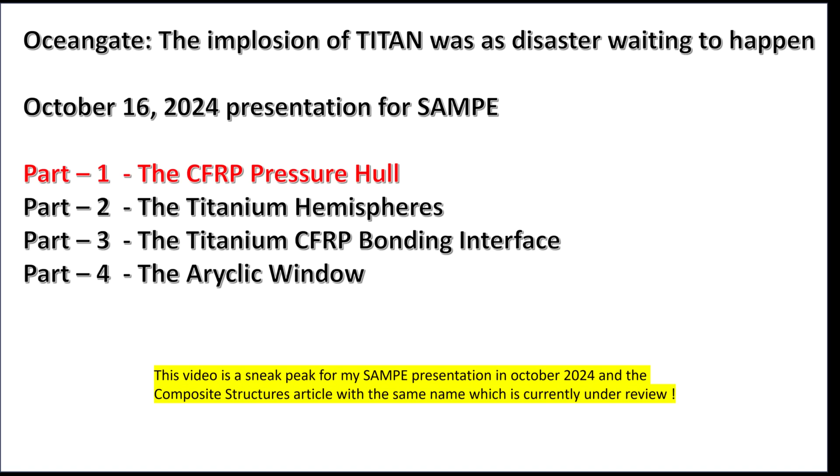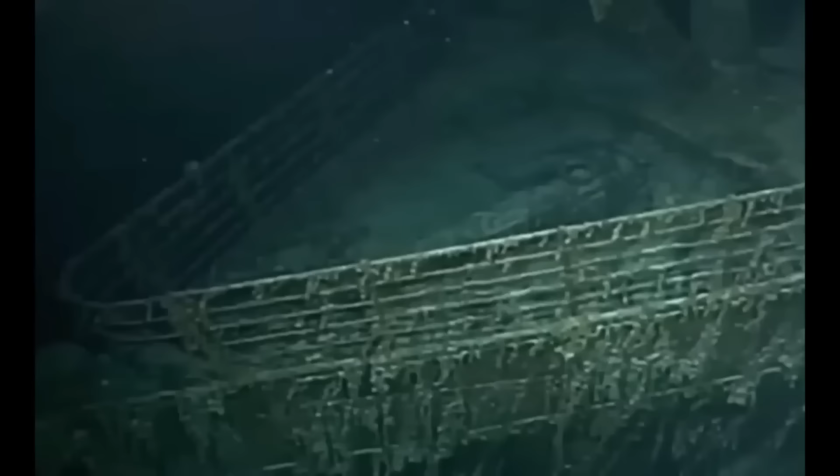On 18th June 2023, Titan, a submersible operated by the company OceanGate, imploded during an expedition to view the wreck of the Titanic in the North Atlantic Ocean off the coast of Newfoundland, Canada.

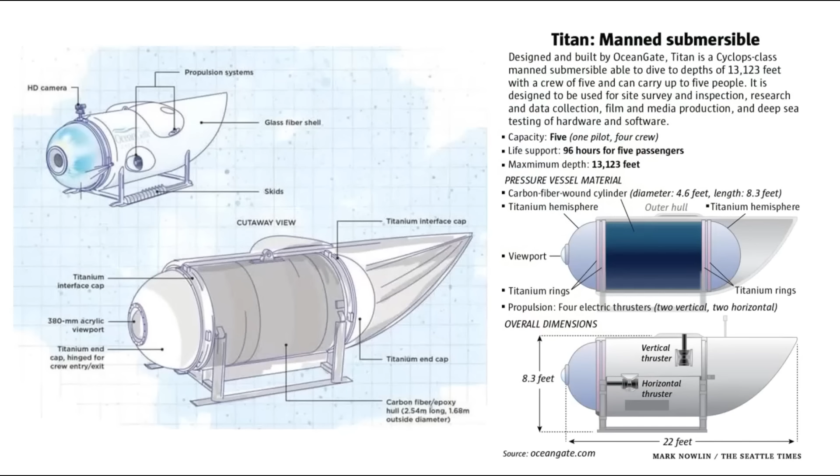Formerly known as Cyclops 2, Titan was a 5-person submersible operated by OceanGate. The 6.7-metre-long, 10-ton pressure vessel was constructed from carbon fibre and titanium.

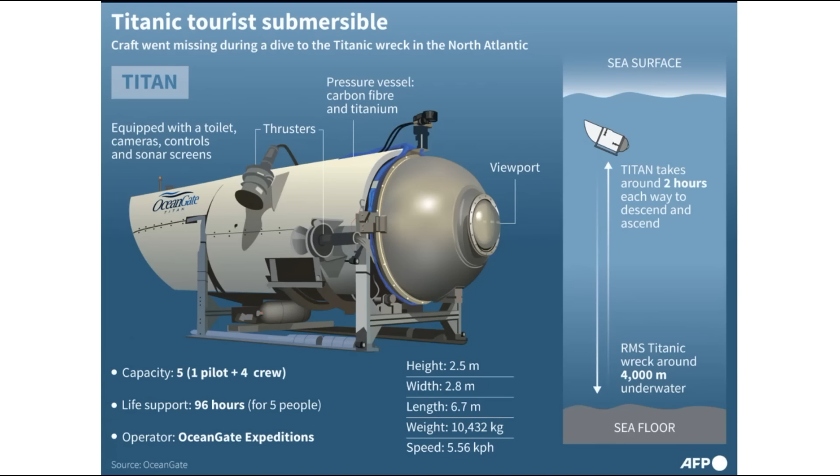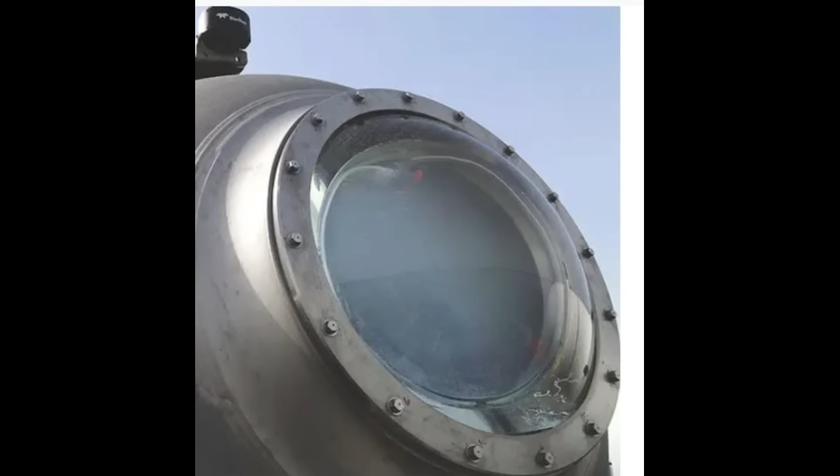The pressure vessel consisted of 2 titanium hemispheres with matching titanium interface rings bonded to the 2.54-metre-long carbon fibre wound cylinder. One of the titanium hemispherical end caps could be detached to provide the hatch and was fitted with a 380mm diameter acrylic window.

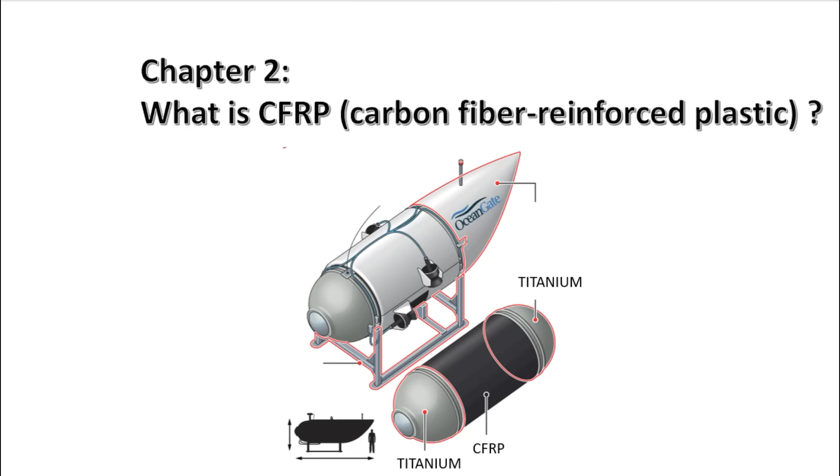While myriad issues likely contributed to the vessel's demise, Titan's carbon fibre hull has drawn particular scrutiny, especially because it was one of the first submersibles to use such a material. Carbon fibre reinforced plastic, CFRP, is a material consisting of several constituents: a base or carrier substance, also called matrix, and a second reinforcing component, the carbon fibre, which is embedded in the matrix.

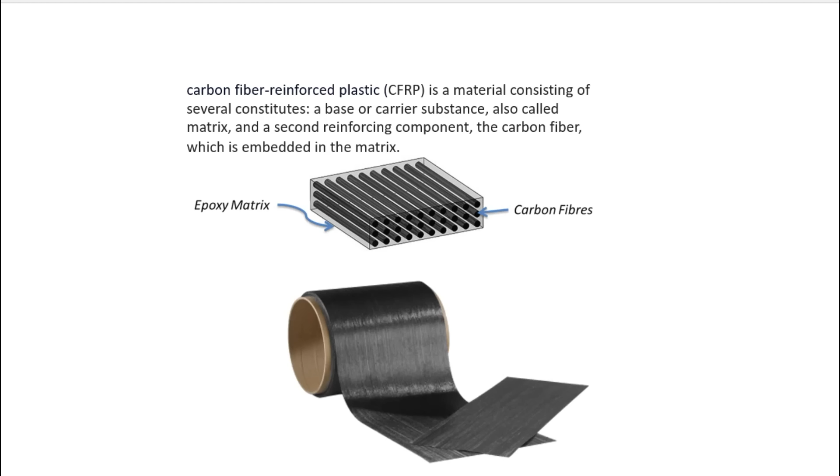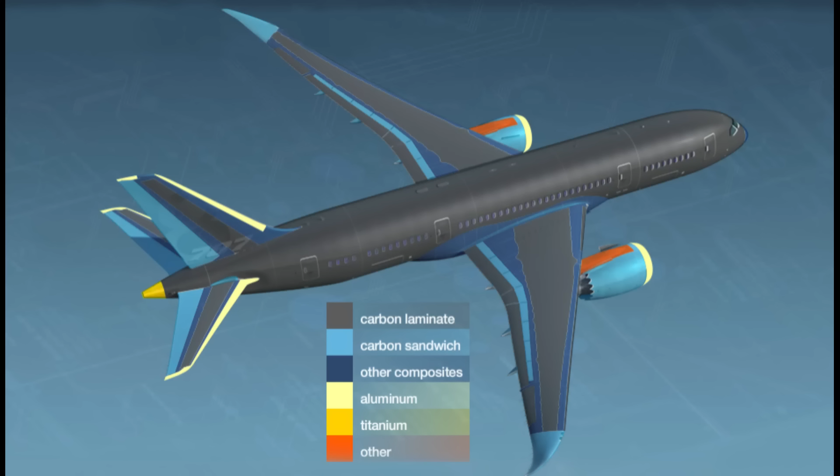CFRP is a composite material renowned for its high strength-to-weight ratio, making it a preferred choice in various high-performance applications such as aerospace, automotive, and sporting goods. The unique properties of CFRP arise from the combination of carbon fibres and a polymer matrix.

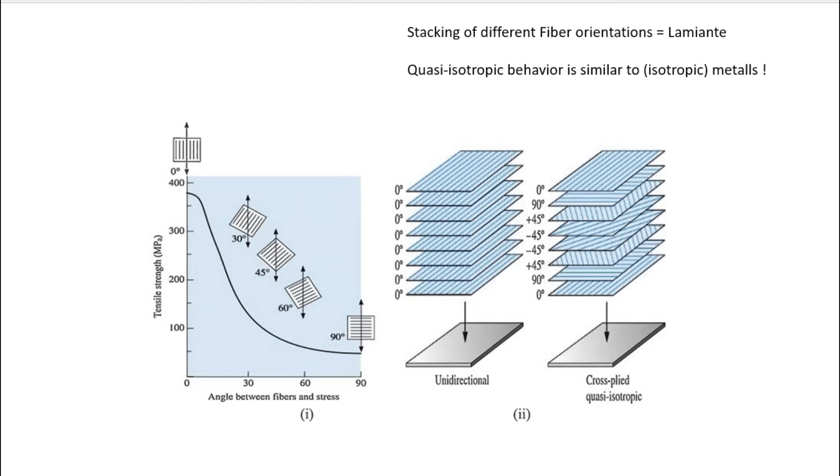The performance characteristics of CFRP are significantly influenced by the orientation of the carbon fibres within the polymer matrix. Carbon fibres are incredibly strong along their length, but relatively weak in other directions. Thus, the orientation of these fibres in the matrix is crucial to achieving the desired mechanical properties.

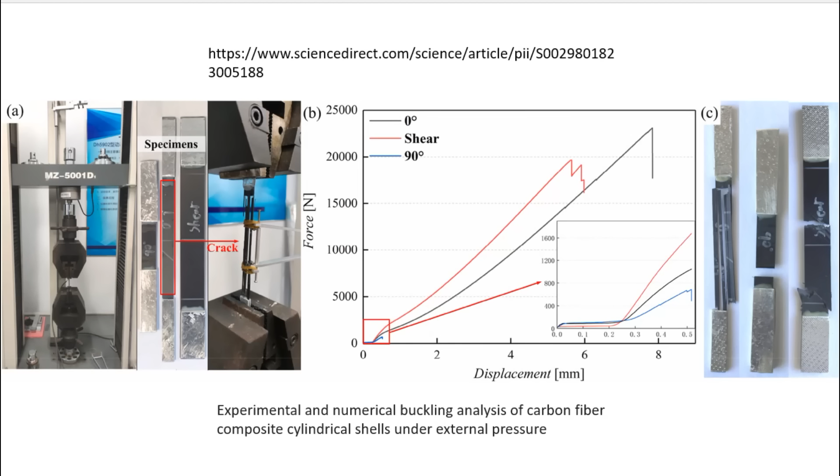Common fibre orientations include unidirectional, where fibres are aligned in a single direction. This orientation provides exceptional strength and stiffness along the direction of the fibres, making it ideal for applications where loads are primarily in one direction.

Bidirectional cross-ply: fibres are woven into a fabric, providing strength in 2 perpendicular directions. This orientation offers a balance of strength and flexibility, useful for components that experience multidirectional loads.

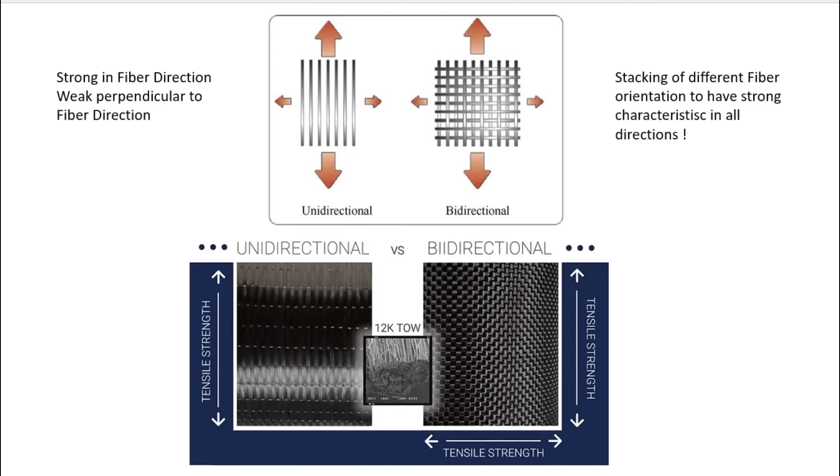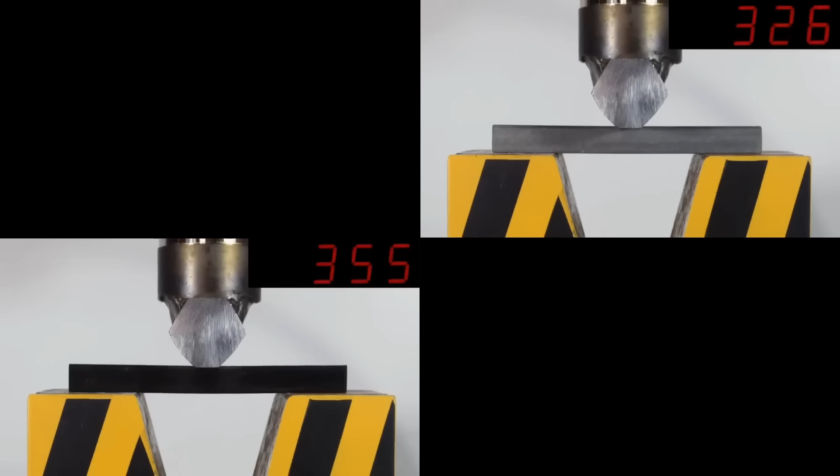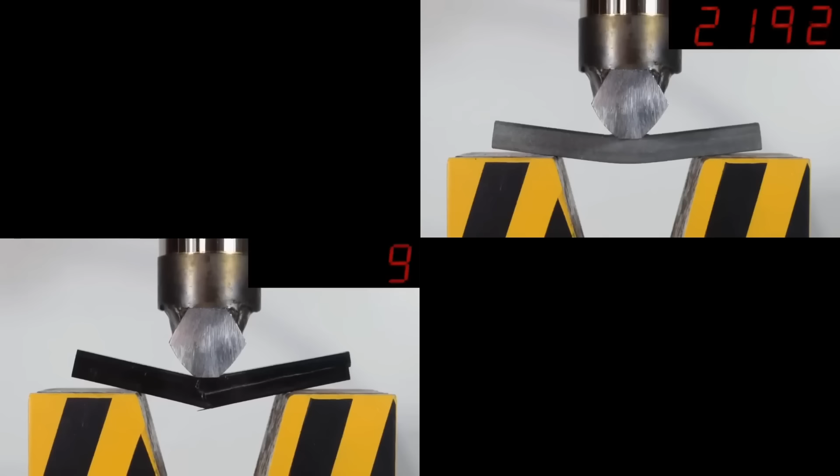A commonly shared misconception about the material strength of CFRP is shown here in the following video. This video shows a 3-point bending test of a CFRP and a titanium specimen. The titanium specimen carries about 3 times the load until failure compared to CFRP, and therefore people concluded that titanium is much better than CFRP.

But this video doesn't show the whole truth from an engineering perspective. From the looks of it, both test specimens are about the same dimensions. Titanium carries 3 times the load until failure compared to CFRP, but titanium is also about 3 times heavier. So in terms of load-to-weight ratio, both materials are about the same in this 3-point bending test scenario.

In a pure tension test scenario, CFRP can handle about twice the load of titanium. In a pure compression test scenario, it is about as good as titanium.

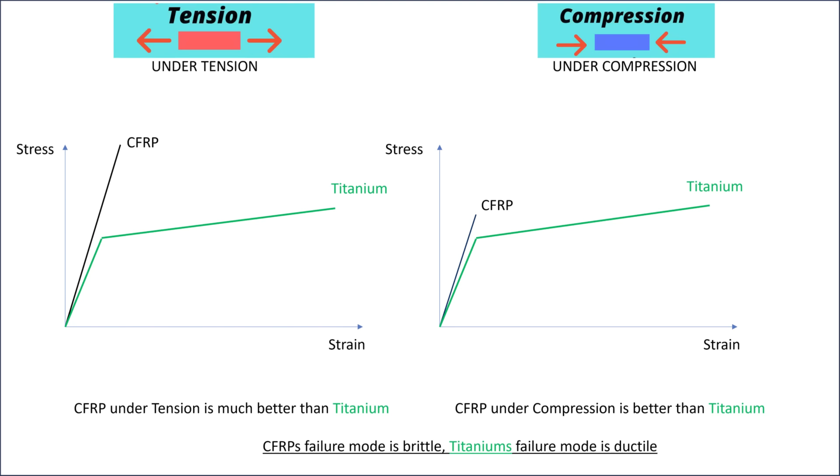The main difference is the failure mode of the material. CFRP is brittle, which means it breaks instantly when its material strength is exceeded. Titanium is ductile and carries still some load after exceeding its yield strength and doesn't break immediately. The brittle failure mode is the main disadvantage of CFRP because it doesn't allow any errors in design calculations.

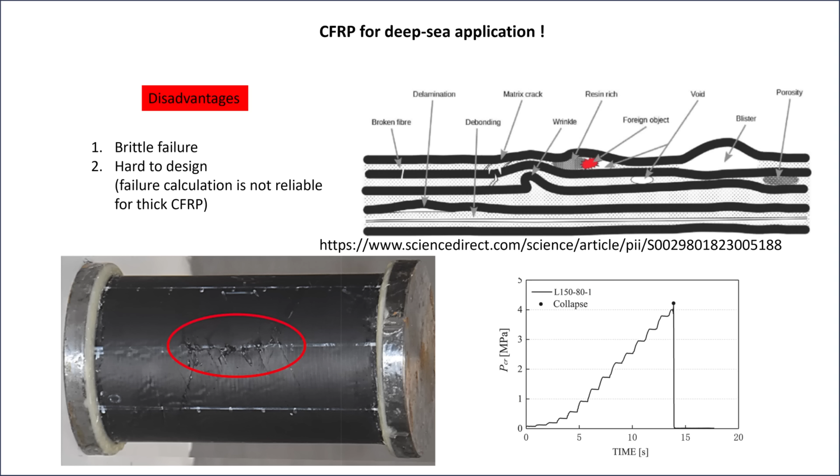The CFRP cylinder of the Titan was manufactured 2 times. The first version was built in 2017 by Spencer Composites. The carbon fibre hull of the Titan features alternating layers of UD prepreg in the axial direction and wet wound carbon fibre filaments in the hoop direction.

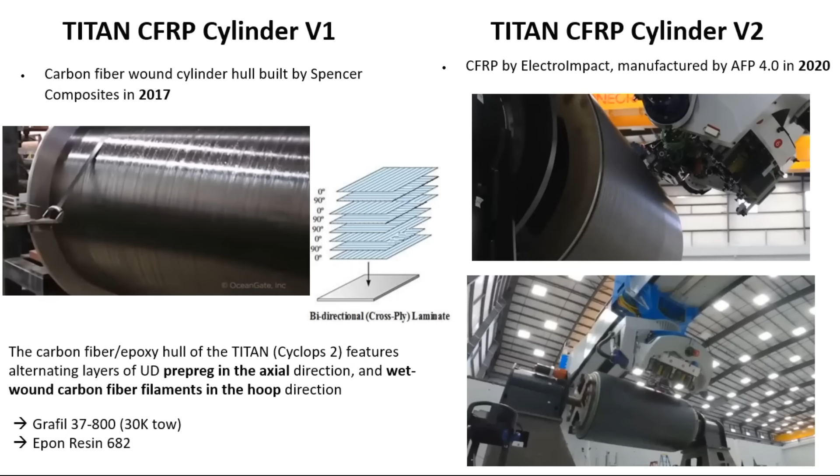The second version was built using automated fibre placement by ElectroImpact in 2020. The cross-section of the second CFRP cylinder has 667 layers of CFRP and is 127 millimeters thick.

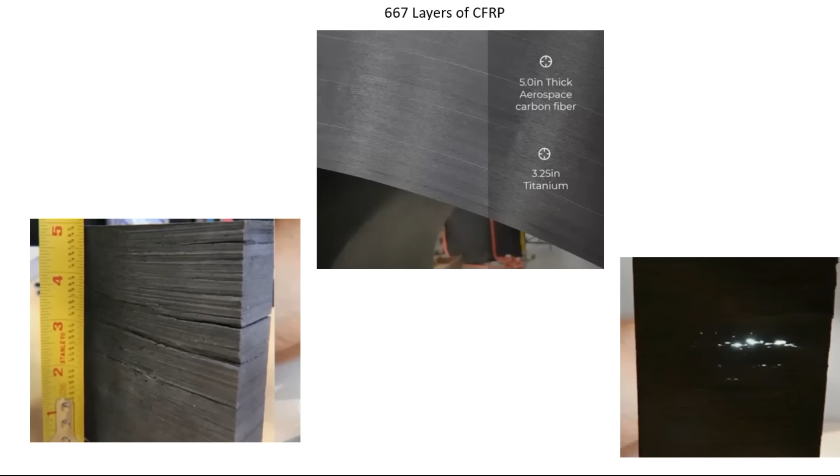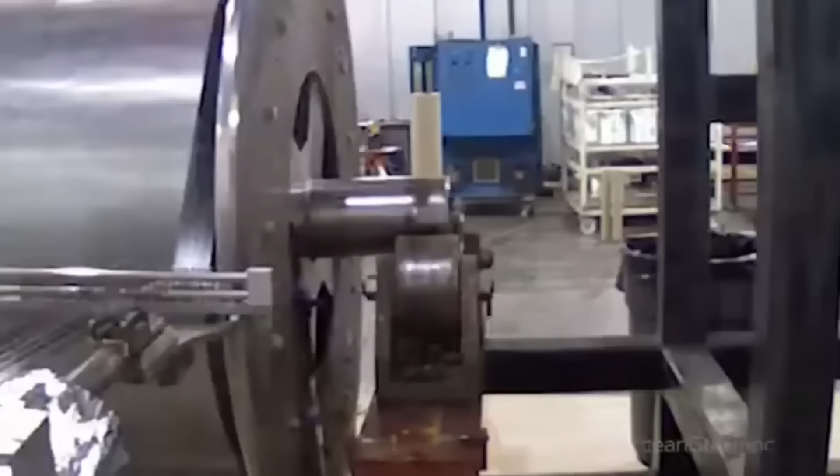The manufacturing process of the CFRP cylinder works like this. A mandrel, which serves as the core around which the carbon fibers are wound, is prepared. The mandrel can be made from various materials, including metal, plastic, or even dissolvable materials if the mandrel is to be removed after curing. The filament winding machine is set up, which consists of a rotating mandrel and a fiber delivery system.

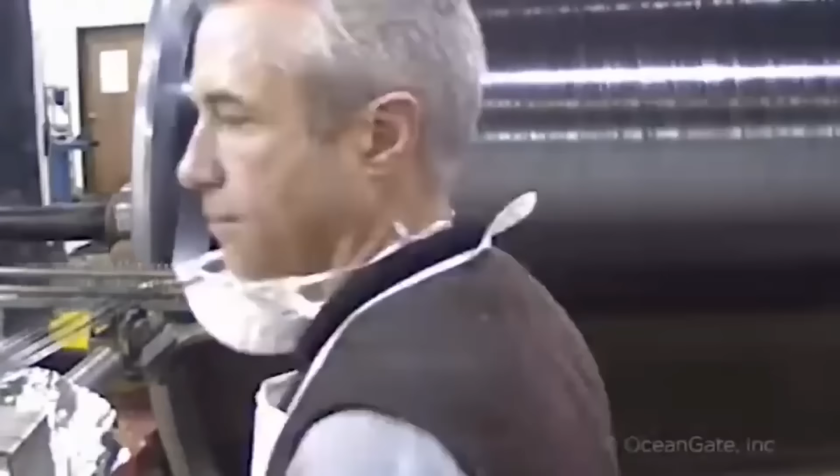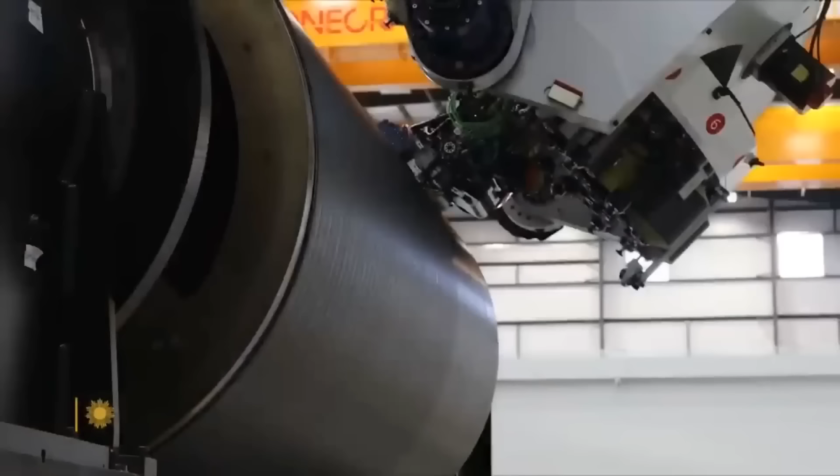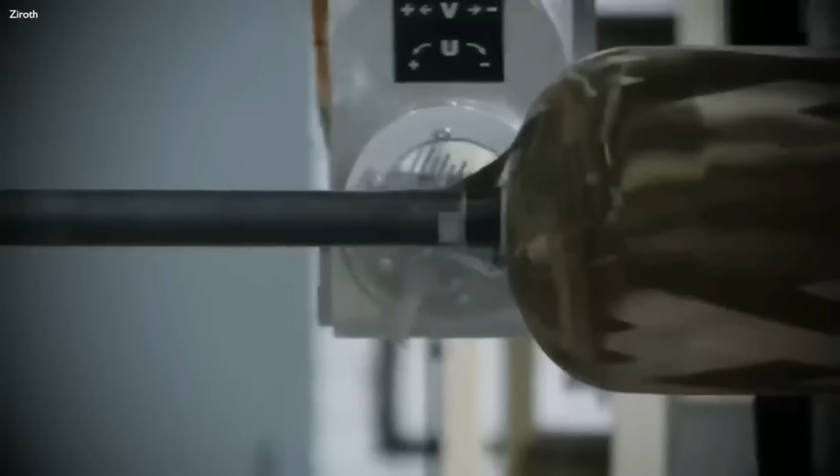Carbon fibers, typically pre-impregnated with resin (known as prepreg), or dry fibers that are wetted with resin during the winding process, are fed from spools through tensioners to the winding head. The mandrel rotates while the winding head moves along its length, laying down the fibers in specific patterns. Multiple layers of carbon fiber are applied to build up the desired wall thickness.

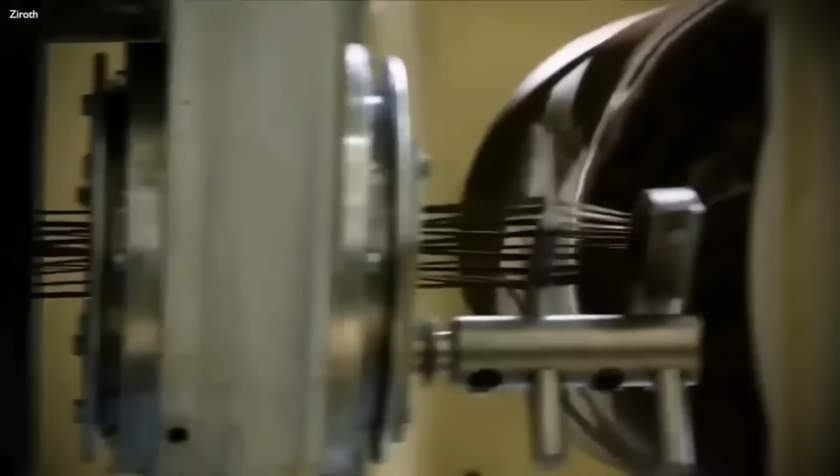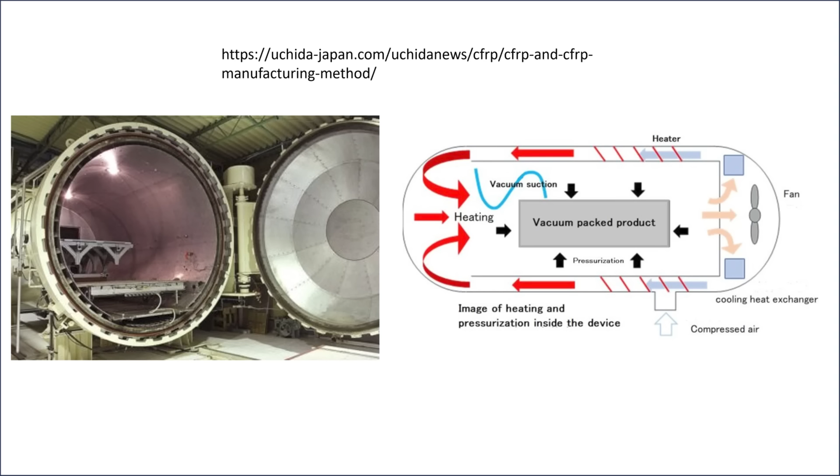After winding, the composite material is cured to harden the resin and lock the fibers in place. The curing process involves heating the mandrel and wound fibers in an oven or autoclave, following a specific temperature and pressure cycle. Once curing is complete and the composite has solidified, the mandrel is removed.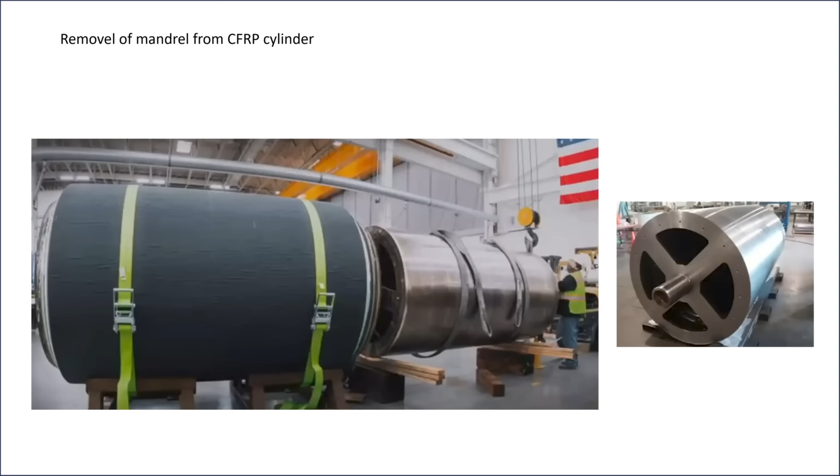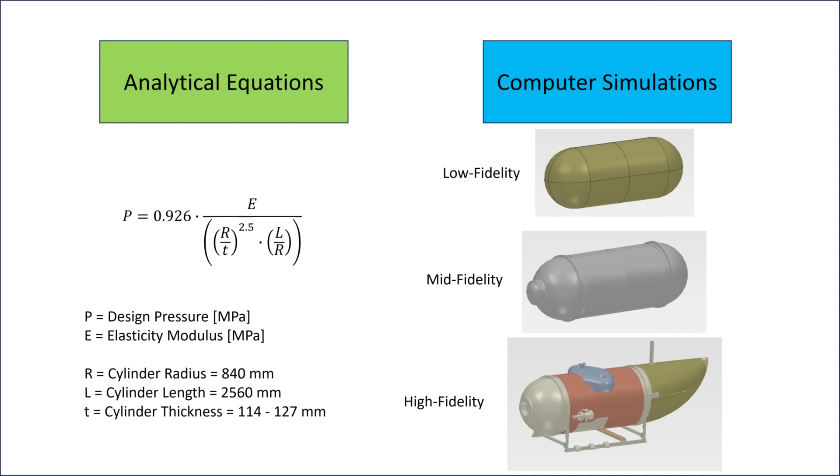The design of the Titan can either be done using analytical equations or computer simulations. Analytical equations work well for isotropic materials like titanium, but are not as reliable for thick composite structures like the CFRP cylinder. Computer simulations can be categorized according to their order of fidelity, like low, mid, and high fidelity.

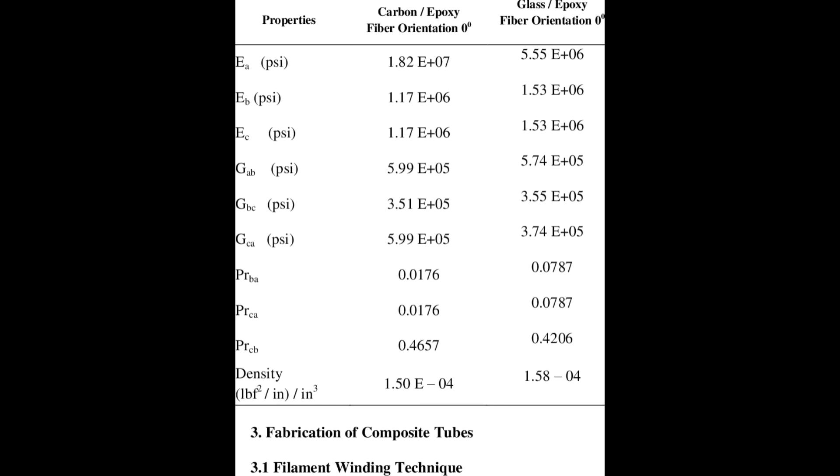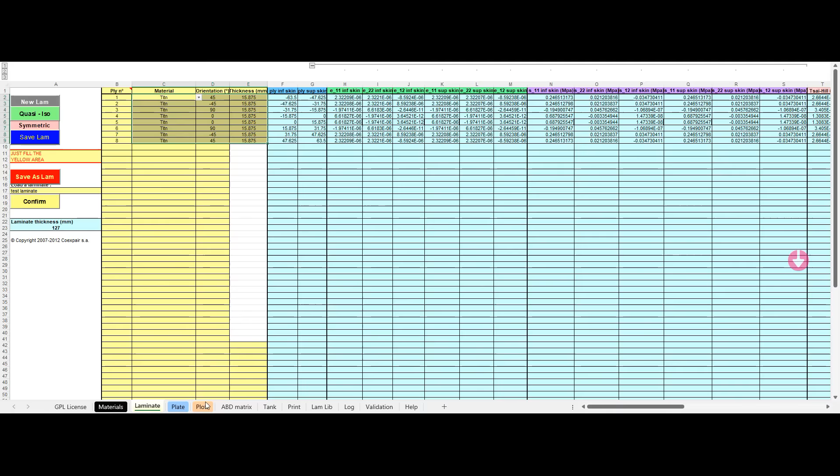The analytical equation shown here is only valid for isotropic material and is not compatible with the CFRP material description, which requires multiple material parameters. But using the well-known ABD stiffness composite matrix, we can treat CFRP as an isotropic material, as we assume the individual laminate layers can be smeared to a quasi-isotropic material. The analytical buckling pressure is estimated to be 84 megapascals using this methodology.

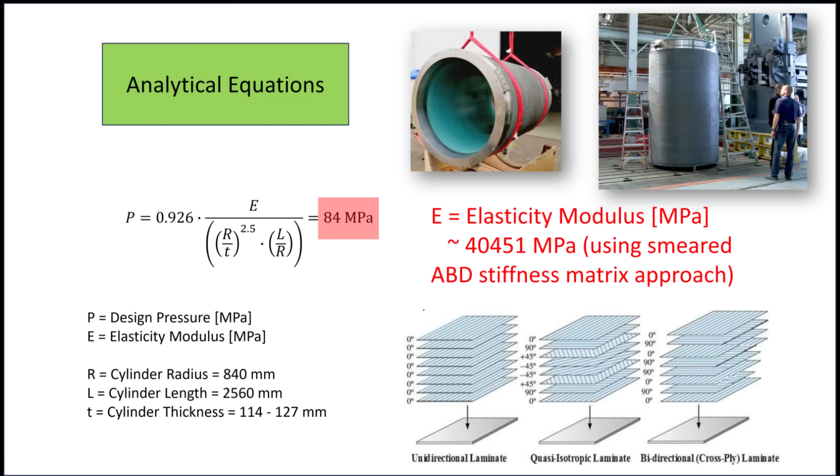In the simulations, three main aspects are considered. The first aspect is buckling. The linear buckling analysis results in a design pressure of about 70 megapascals, depending on the order of fidelity.

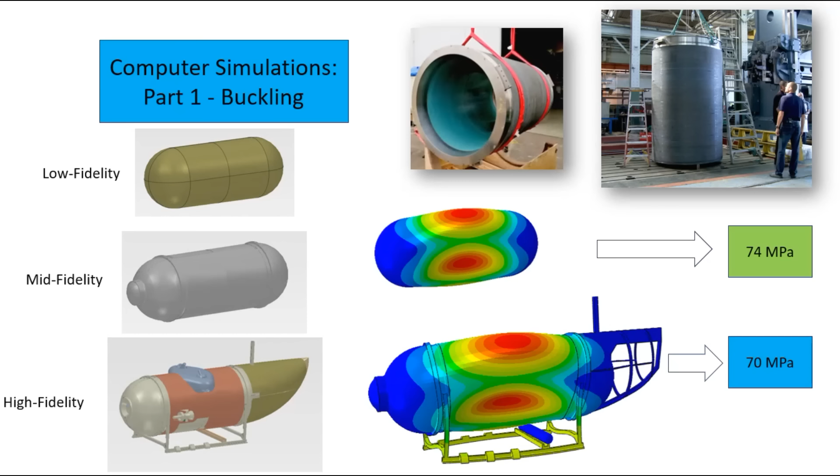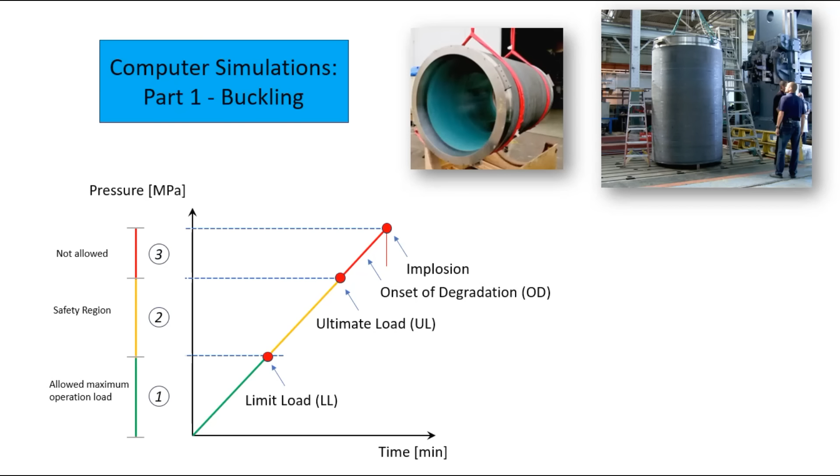The design of the CFRP pressure vessel is usually divided into three regions: the limit load, the ultimate load, and a safety reserve. The limit load is the operation load of the Titan, which is assumed to be 40 megapascals, which corresponds to the pressure that we would expect at the depth of the Titanic.

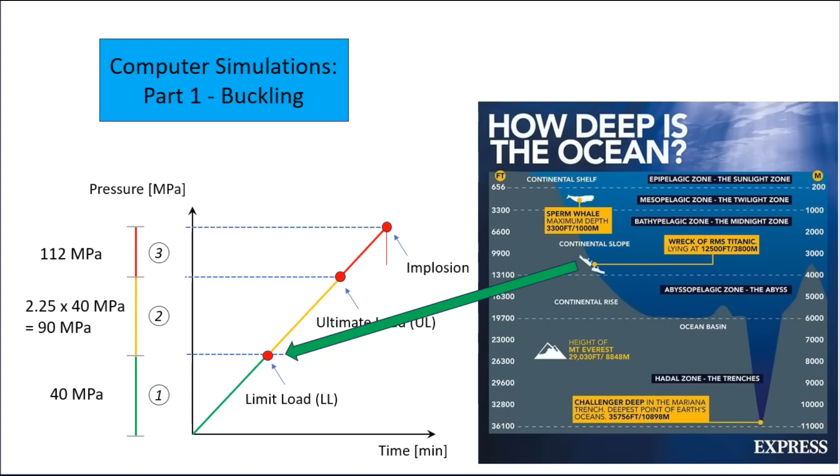The ultimate load is the product of limit load times a safety factor, which was 2.25 according to an article in Composite World. The article stated that a safety factor of 2.25 for a thickness of 114 millimeters was established for the CFRP cylinder, but the thickness of the CFRP cylinder was increased to 127 millimeters for additional safety.

However, the results of analytical equation and simulation show much lower loads than we would expect. If we have 90 megapascals for a thickness of 114 millimeters, the maximum pressure in the safety region would be 112 megapascals for a thickness of 127 millimeters. Instead of 90 megapascals, our simulation shows 74 megapascals, and even if we increase the thickness to 127 millimeters, we barely get about 90 MPa as a design load.

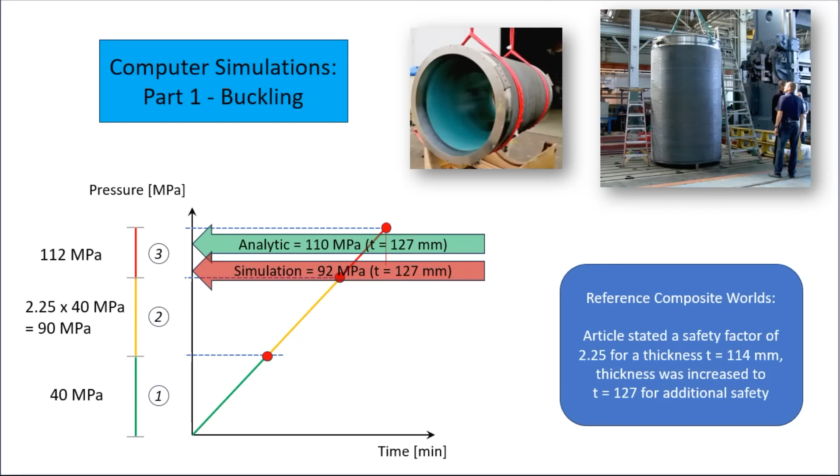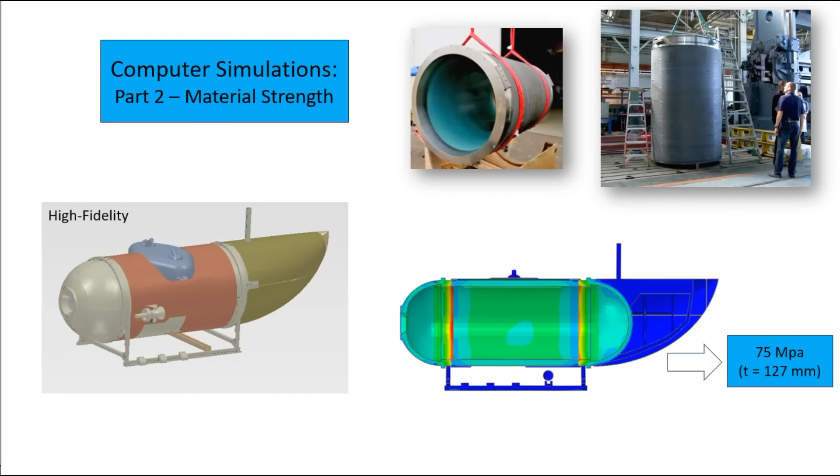The second part of the simulation involves material strength. In the case of CFRP, we consider fiber as well as matrix fracture in tension and compression. Using this methodology, we get a design load of about 75 megapascals.

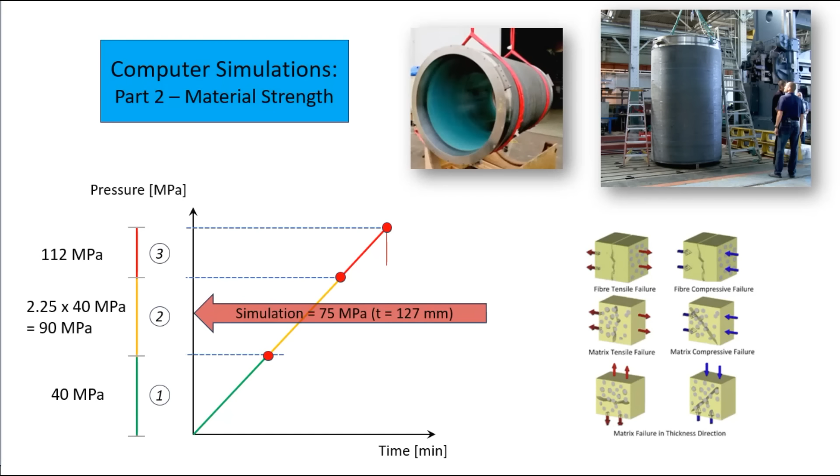If we consider imperfections as a third aspect, the design load is reduced even further. The well-known energy barrier criterion, EBC, delivers a design load of 56 megapascals.

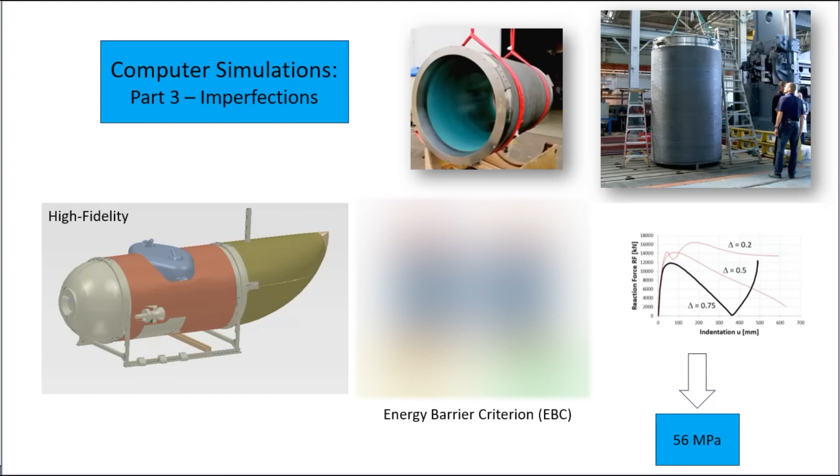There are still some open aspects, like: 1, variation of material data; 2, variation of wall thickness; 3, effect of temperature; 4, effect of dry-wet cycle; 5, adjacent structure influence, which is not considered. The design factor is already lower than 1.5.

What does the CEO of OceanGate have to say about this rather low margin of safety?

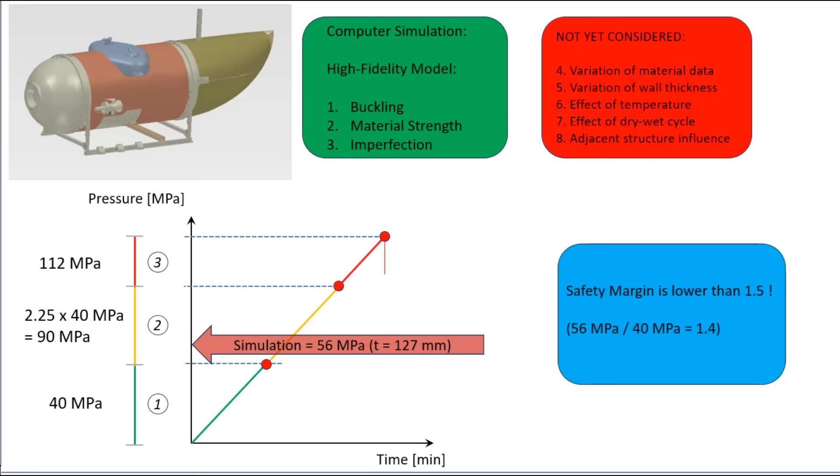Because of this statement, I wanted to interview Stockton Rush, the CEO of OceanGate, and flew all the way to Borneo to meet him. You might think that this Stockton Rush is washing socks as some kind of circus trick, but not so. He is preparing the manufacturing process for his submersible Titan.

Mr. Rush, how would you connect the CFRP cylinder to the titanium domes? Can you show me?

Well, that went differently than expected.

You might think, okay, the safety factor is about 1.4. What's the problem when I never dive deeper than 4,000 meters anyway? The problem lies in the assumption that you know and understand everything.

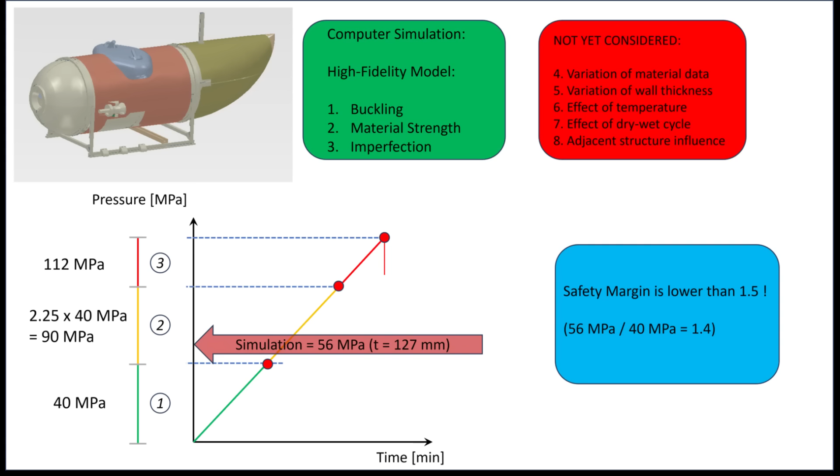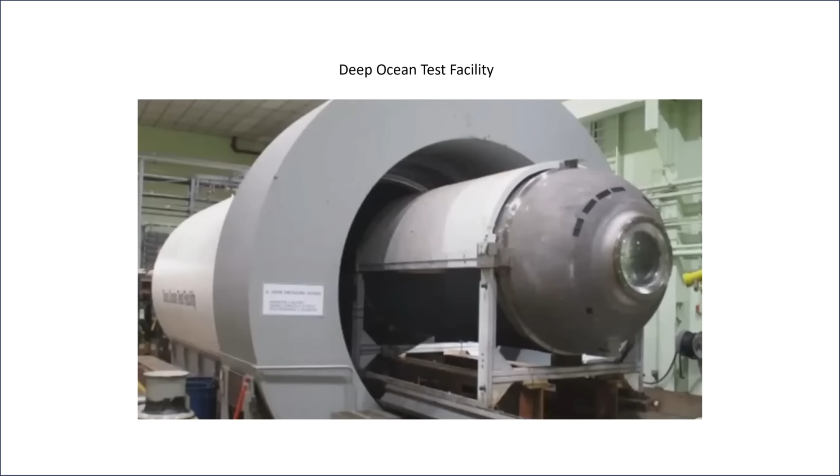The Titan dived multiple times to the Titanic and was tested in the Deep Ocean Test Facility, but this is not a proper test program according to engineering standards. Here is what a proper engineering test program for a manned submersible looks like. Doing one dive to 4,000 meters is not a test program.

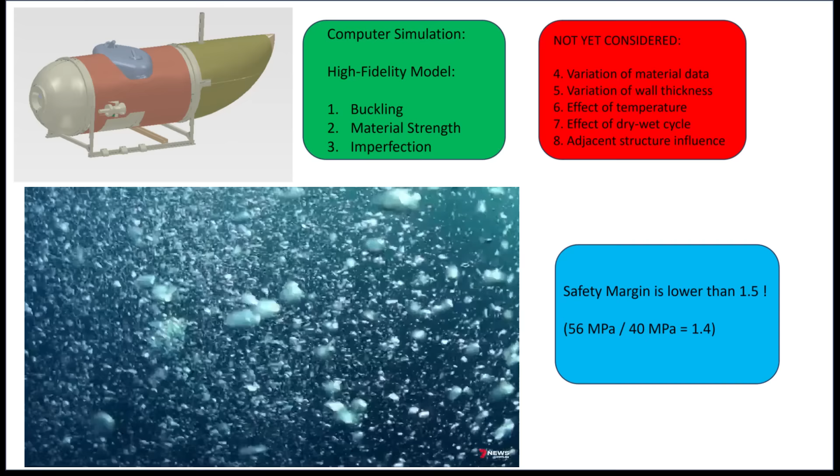A proper test program on any new pressure vessel, where we don't know how it behaves, requires 3 tests. The first is you've got to blow up 5 units, crush them, and find out that the crush pressure actually matches your calculation. If it's all over the place, it means your calculations are no good.

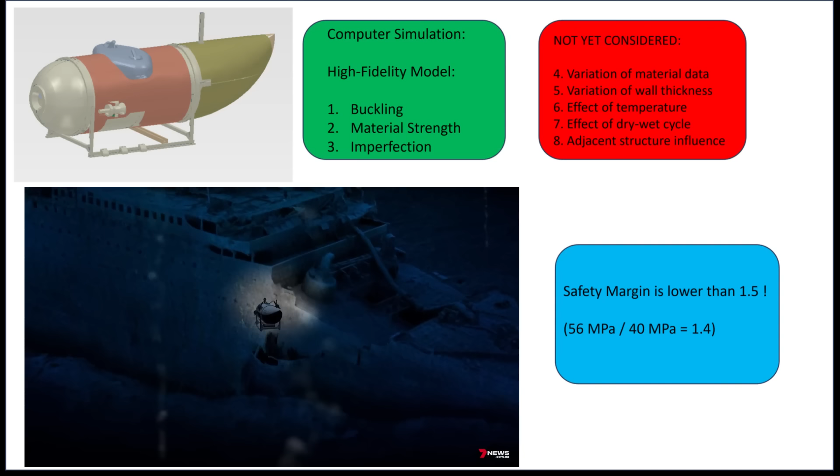The second test is you've got to put it under constant pressure for 3 months at 6 times the design pressure, because plastic creeps. It keeps moving, so it might be fine for the first hour, but after 4 hours it deforms and collapses. So you put it for 3 months under 6 times the design pressure.

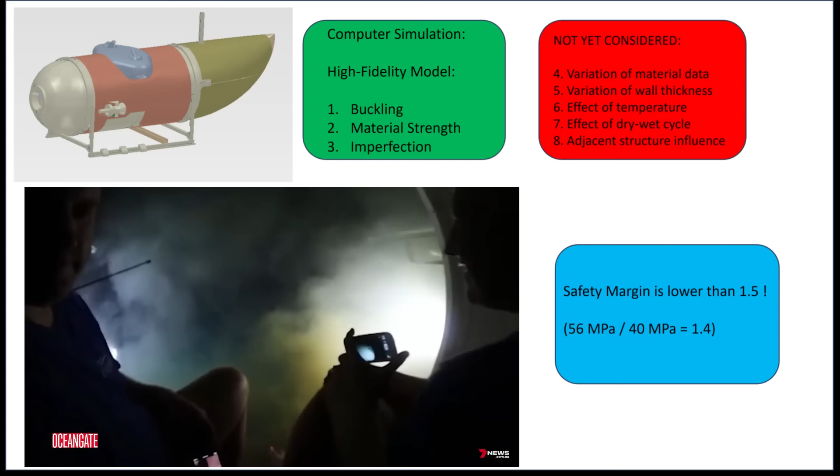And after that, you've got to cycle it at full pressure for 1,000 times. Well, that takes the better part of 2 years to do.

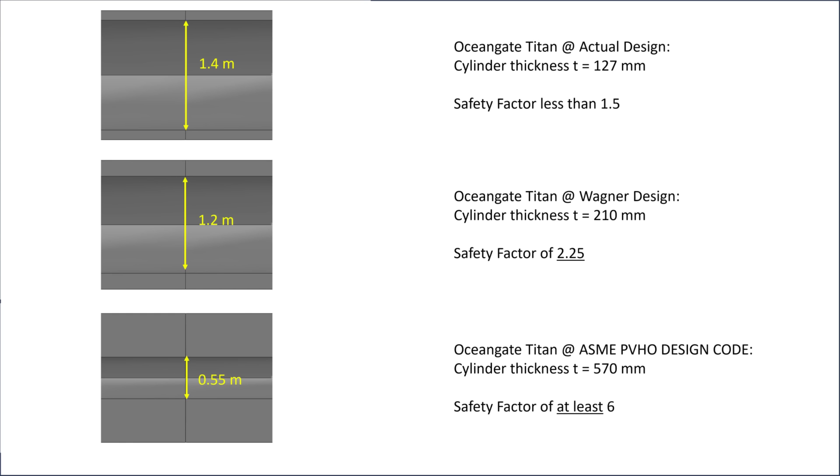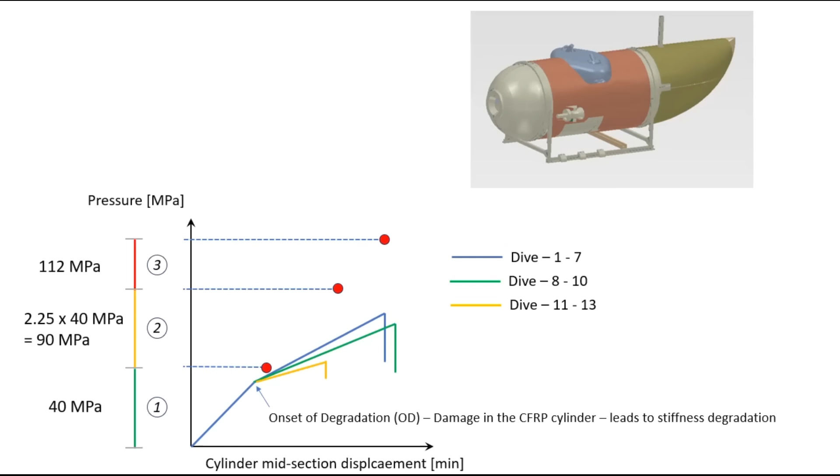As we have heard, the ASME design codes require a safety factor of 6, which would lead to a much thicker CFRP cylinder than the one the Titan had. The most likely cause for the implosion of the Titan was cycle fatigue damage, meaning that over time, damage accumulated in the CFRP cylinder from each dive, which led to the final failure of the submersible.

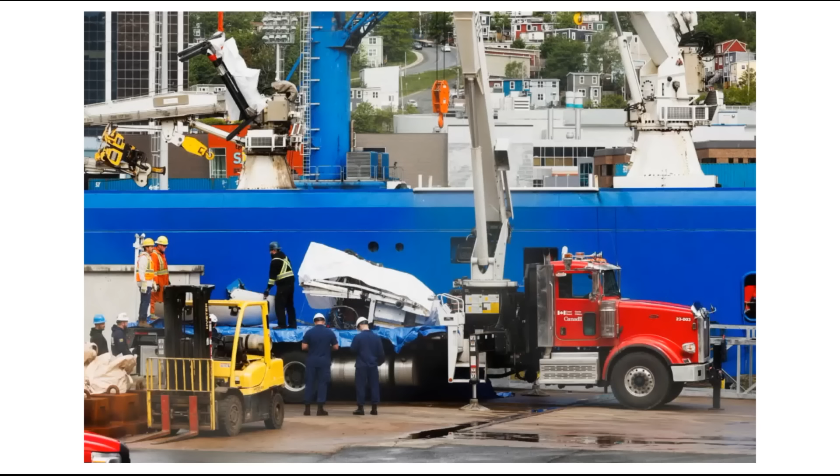The debris of the Titan consists of the front hemisphere, without the acrylic viewport, the tail section, panel parts, the support legs, and the interface rings. Neither the CFRP cylinder nor human remains were found.

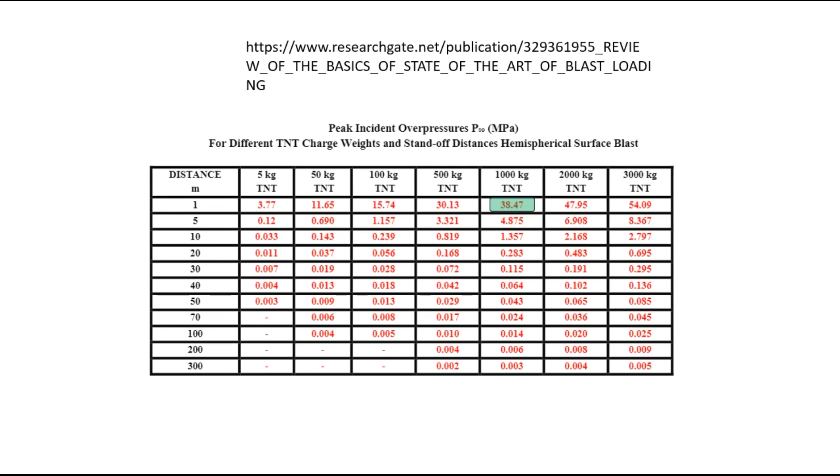Even a pressure difference of about 200 kilopascal within a short distance would lead to the collapse of the lungs. This table lists different TNT charge weights and distances for comparable pressure differences. According to this table, the Titan implosion at the depth of the Titanic is about as bad as standing near a 1-ton TNT charge.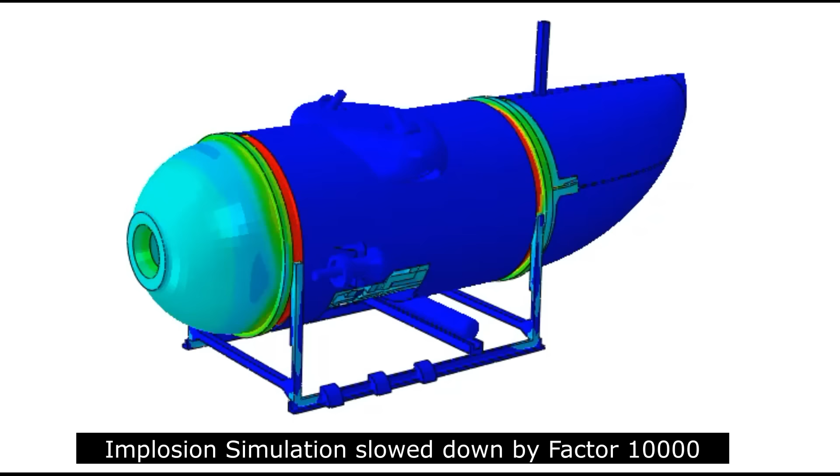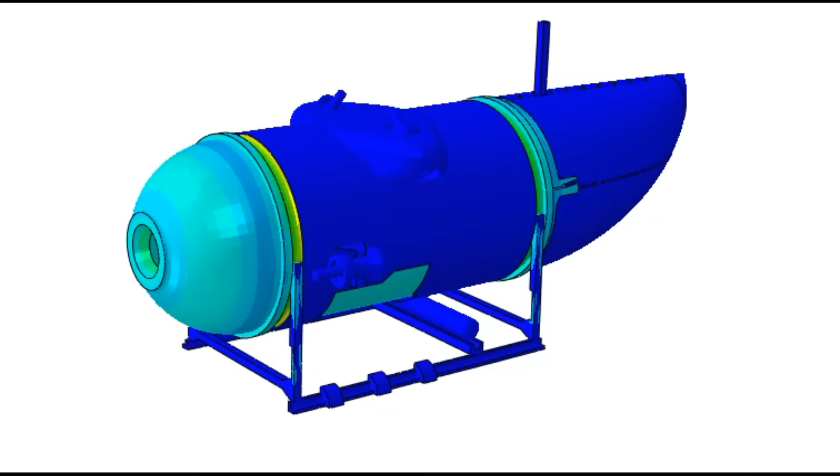This implosion simulation shows first the collapse of the CFRP cylinder, and afterwards both hemispherical caps move together, the panels are mostly destroyed, and the support legs are ripped off the pressure vessel. The whole process from CFRP cylinder fracture to complete implosion takes only 6 milliseconds.

The human brain needs about 30 milliseconds to process images and about 100 milliseconds to process pain, so the crew of the Titan neither saw what was coming, nor did they feel anything.